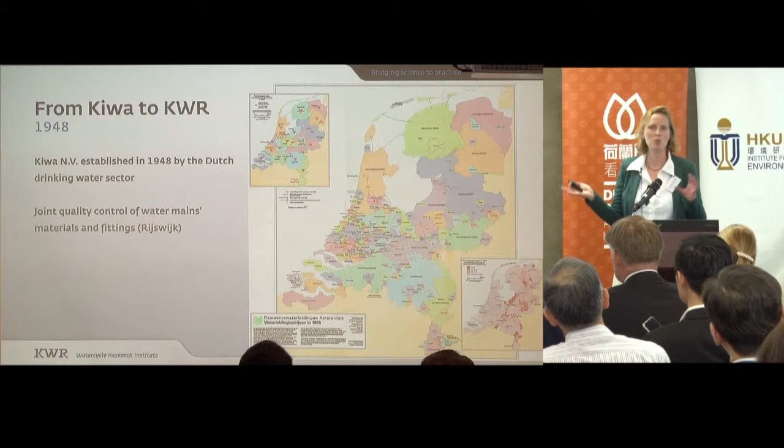I work with KWR, and I thought it would be nice to quickly introduce what KWR actually is. In 1948, there were about 150 water companies in the Netherlands, and they decided to team up. They started KIWA, which was really about certification of water-related articles back then. Then in 1971, they also decided to set up a joint research program, and that was where KWR was originally from. It was then founded.

In 2006, KIWA let us go. So we split, and now it's just KWR. Originally we were KIWA Water Research, but we're not allowed to use that name anymore, so we're really just KWR.

We now have 10 drinking water companies still in the joint research program, and we're so successful that even one from Belgium has joined us as well. So they're our shareholders, and our primary customers as well.

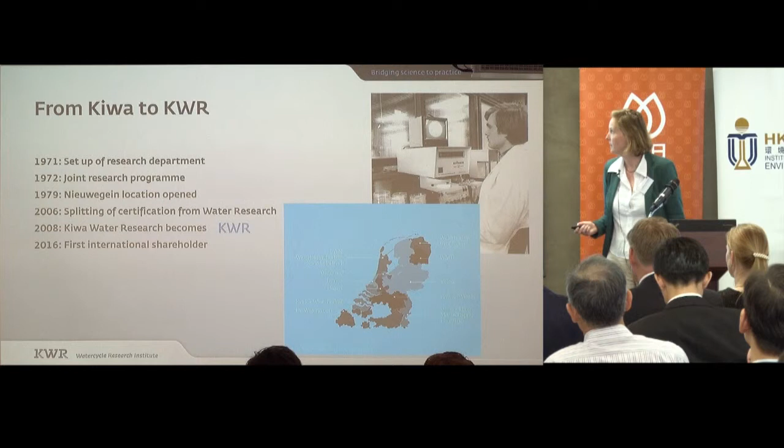We're in this really great building for about 4 years now, very transparent, with lots of places where you can meet colleagues from all different teams. So I'm down here talking to one of my colleagues from the microbiology group. There's lots of interaction across all the different aspects of drinking water and wastewater as well.

I wanted to tell you a little bit about how drinking water is distributed in the Netherlands, some of its peculiarities, and why we have the best drinking water in the world.

We have a network of 120,000 kilometers of pipes. Today, that's about 50% plastic pipes, 30% asbestos cement pipes - which is decreasing - and still about 10% cast iron pipes, usually the older ones.

Leakage is about 3-5%, quite low. The replacement rate is quite low as well, 0.5% per year, but it is increasing, to about 1%, so maybe pipes will be 100 years old when replaced on average. Average pipe age right now is about 45 to 50 years.

The research questions now are much more about how do we maintain this network. In the past, it was about how do we build it, where do we get the money for building new networks. Now it's much more about keeping the best quality we have - which pipes need replacement, when do you replace them, and what do you replace them with.

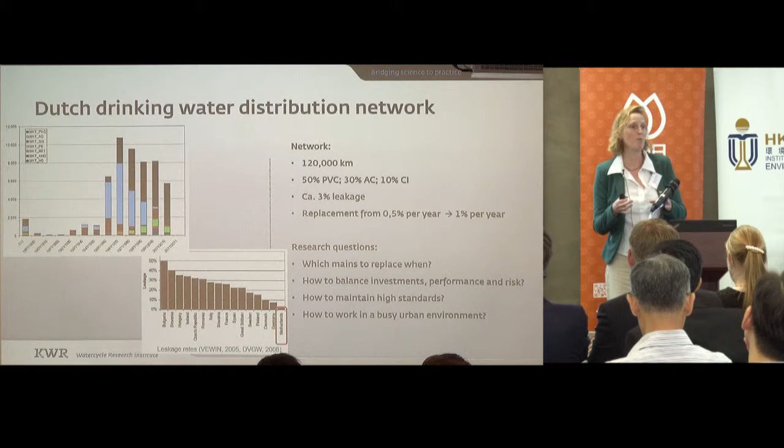This is really a view of the Dutch utilities: when we replace a pipe, we don't just replace it with the same pipe, but we use it as an opportunity to improve our network even further, and really have a future-proof network. Of course, we also see lots of busy urban environments with many other players in the underground, and you have to work with them as well. It's quite a challenge.

So some of the typical things for Dutch drinking water distribution - I've put them in practice, so what's been going on for years and years, then in the second column what research added to that, and a third column on what sort of research we still do.

One important aspect is there's been a focus on quality and long term - it's not a cheap, quick fix solution, it's always a future view and quality view. Also quite important, the fee we pay for drinking water, about €2 per cubic meter, really covers all costs, so there's no subsidies from the government. Water utilities are led like a company, but they're actually in public hands, so their shareholders are municipalities and provinces. There's no residual chlorine in the system.

There's low leakage, low burst rate, and a quite low number of customer complaints on water quality in general, but specifically discoloration is quite low compared worldwide.

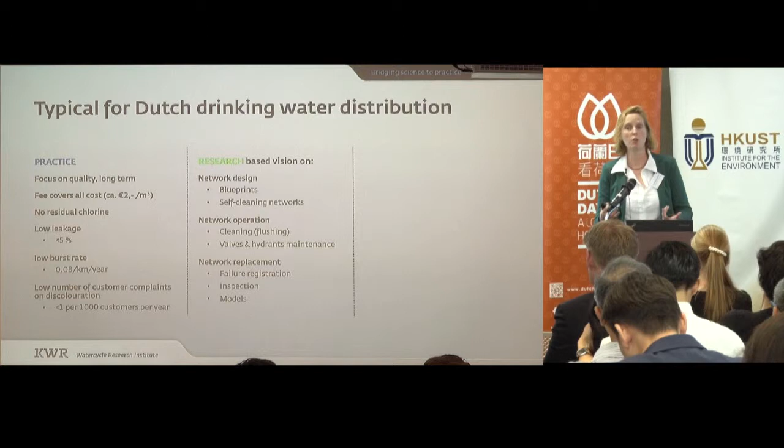What's going on right now, over the last 10 years, you can see they've really put a lot of research results into practice. One of the things is network design - not just putting in big pipes, using plumbing expertise and adding safety factor to safety factor, but really having a research-based vision on what a proper design of a system is and actually building that.

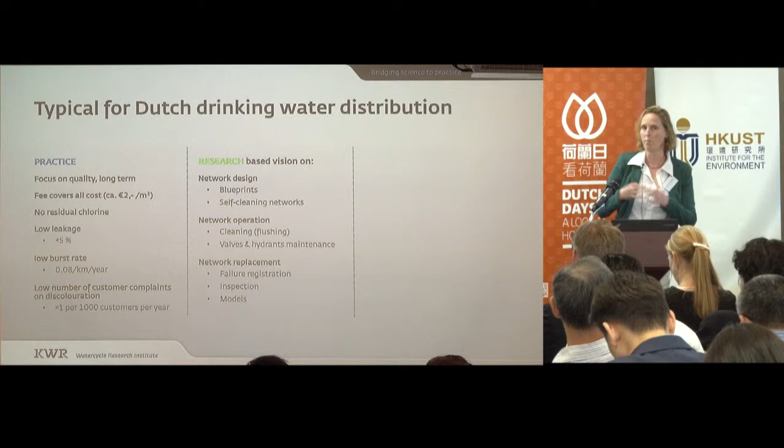Also network operations - we're looking much more at data collected on valves and hydrants, using that for asset management. Same for network replacement, where we incorporate data from the failure registration database, a national registration database, inspection techniques, models, and insight into pipe material degradation.

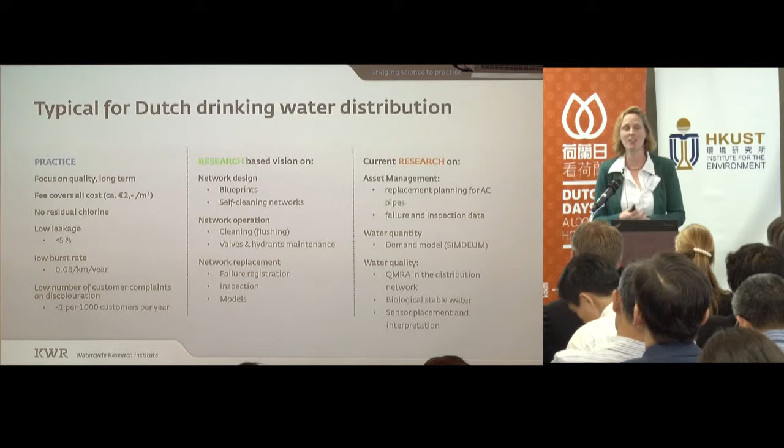I'll discuss a little bit about some of these topics, not all of them, I don't have time. Current research is much focused on asset management, also water quality, demand modeling, hydraulics modeling, and water quality modeling. As we don't use chlorine, we need biostable water - we need to make sure there's no contamination, or as little as possible, and do quantitative microbial risk assessment to keep that low. And of course, sensors and sensor interpretation is a very important research topic nowadays.

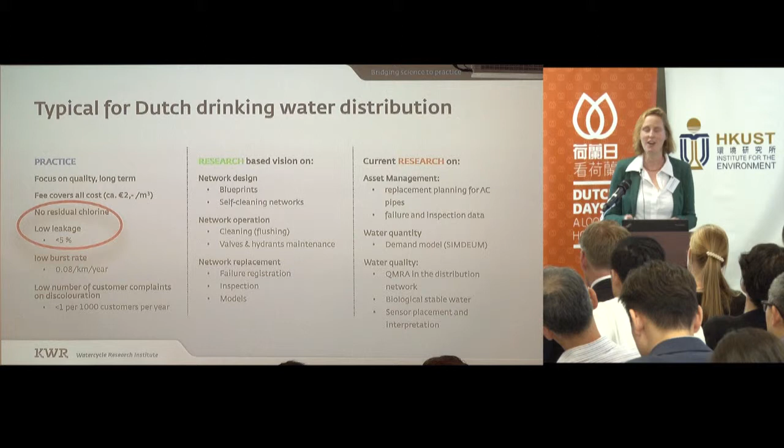So a little bit on the practice. I put in two, but I think I'll talk more about the leakage than the residual chlorine. If you get the slides, you can read this, and there's a paper connected to that.

The low leakage, 3 to 5%, and we didn't really bring it down, it always was this low. How did we do that?

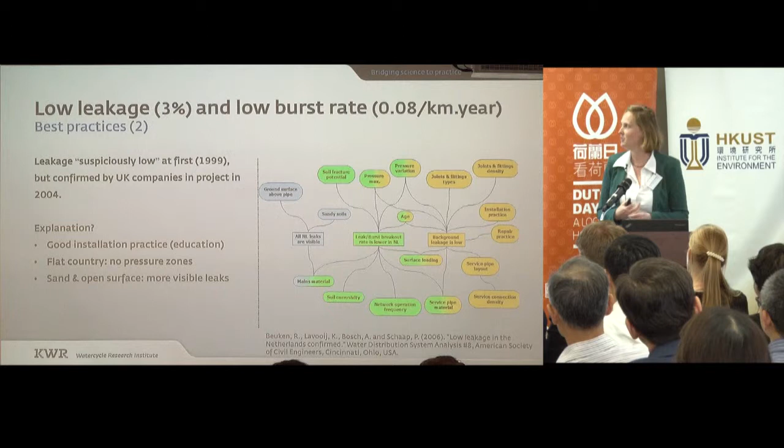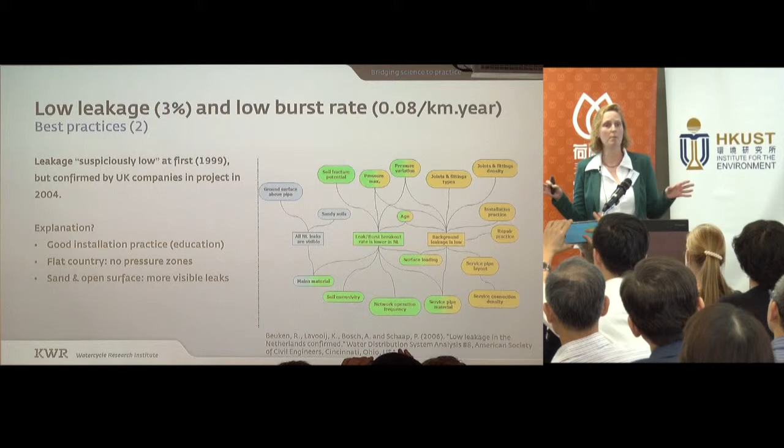In 2004, we did a project with UK companies that really didn't believe us when we said it was 3%. They said suspiciously low, and challenged us to find out how and why, if it was really true. So we used both our methods of top-down and bottom-up estimation of non-revenue water on a UK site and a Dutch site, compared them, and actually they seemed to lead to the same result.

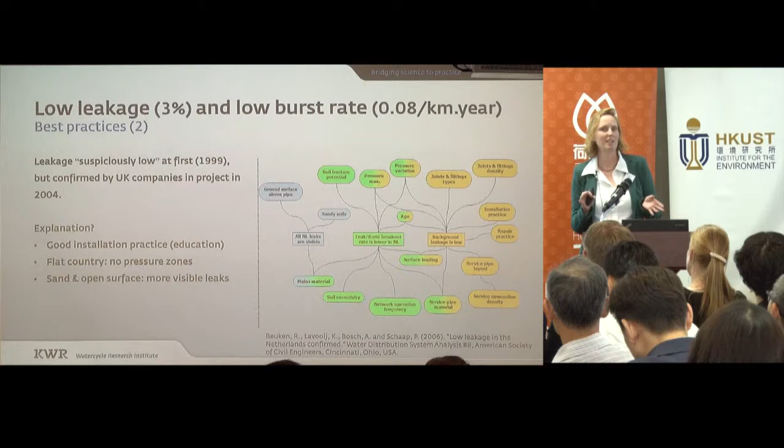We also did some exploration in the field in the Netherlands, trying to find leaks. We didn't go to a place where we thought, oh, this is the best place. We went to somewhere where we thought there might be some leaks, but we didn't really find them.

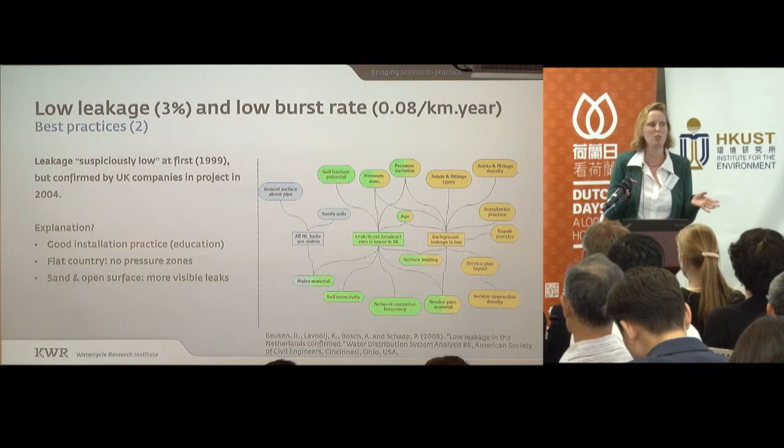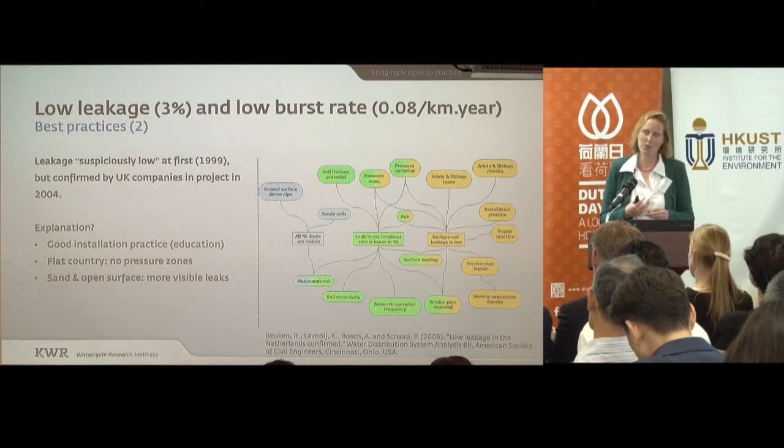But they did come up with some explanations of why leakage is low. And instead of saying suspiciously low, they now say, okay, we believe you. It was confirmed, but still maybe ridiculously low.

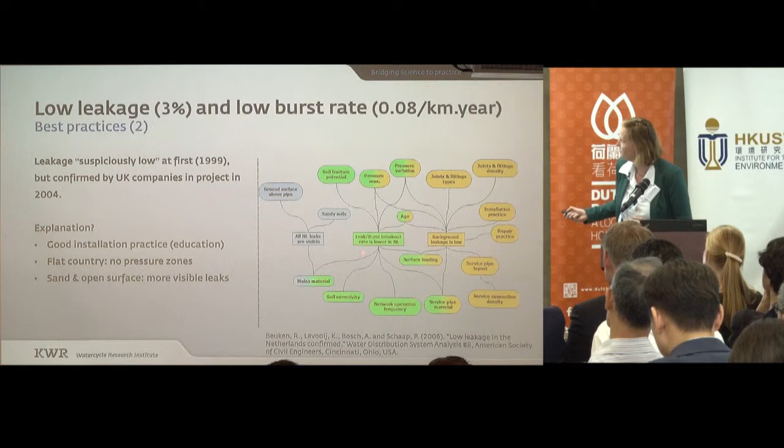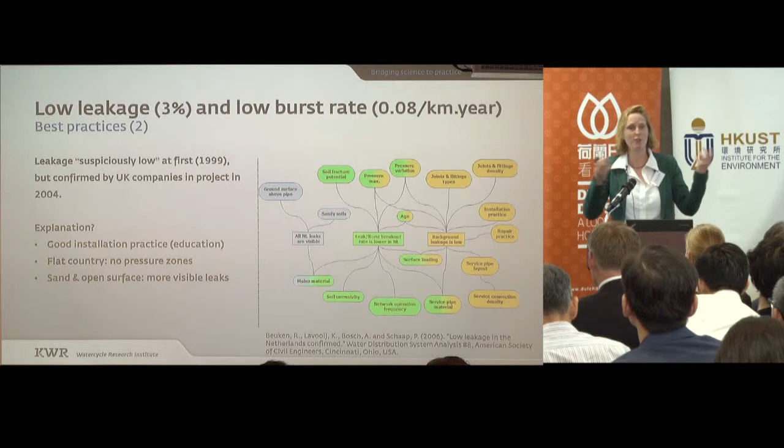Some of this relates to the lucky circumstances that we have. There's low pressure because it's such a flat country. The soil is very permeable - when there is a leak, water will just come up to the surface, and you can quickly find it and repair it. The age of the network is not that high, plus low pressures and things like that.

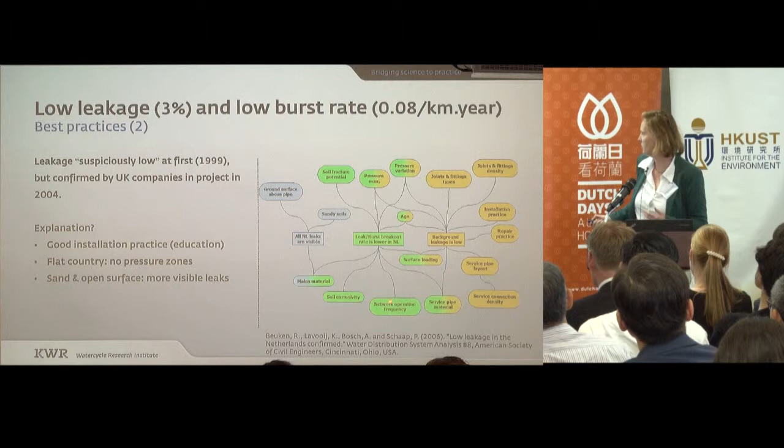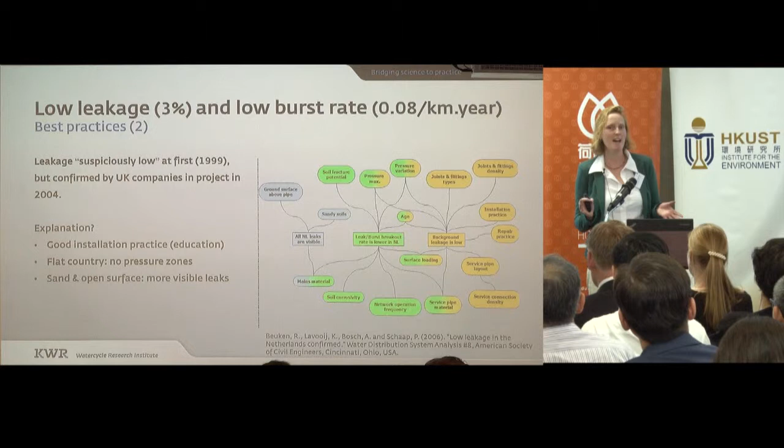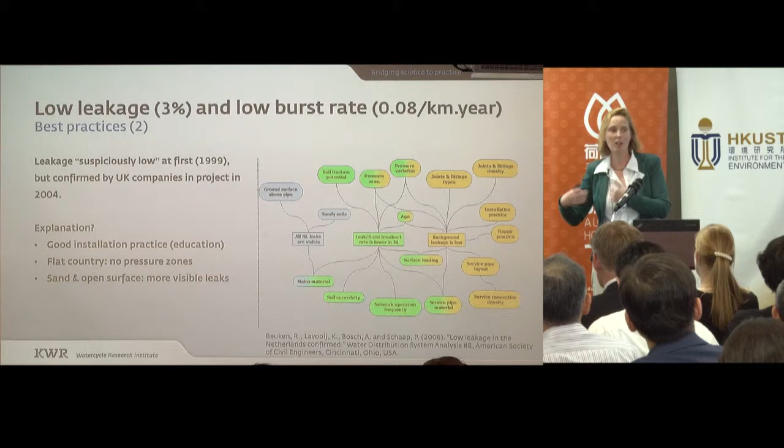But there's also some good engineering practice that we found. The best quote that I have is that somebody from the UK said, I wish that my engineers in the field would speak as good English as yours do - and ours are Dutch people. So it was quite interesting to see that education, and everybody who works on a pipe really knows: I'm working on public health, good water quality is very important.

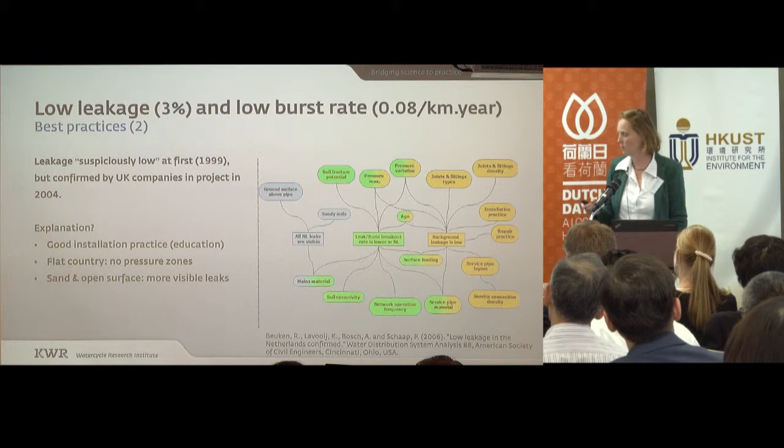So it helps, and it does lead to low leakage because there's a connection for every household pipe, and not everything plugged together, for example. It's really good engineering practice there as well.

Now a little bit on the design of a system - the self-cleaning networks is something that is really very typically Dutch. All Dutch water utilities have implemented it. Some piloting is going on in Belgium, and hopefully next year or this year in the UK.

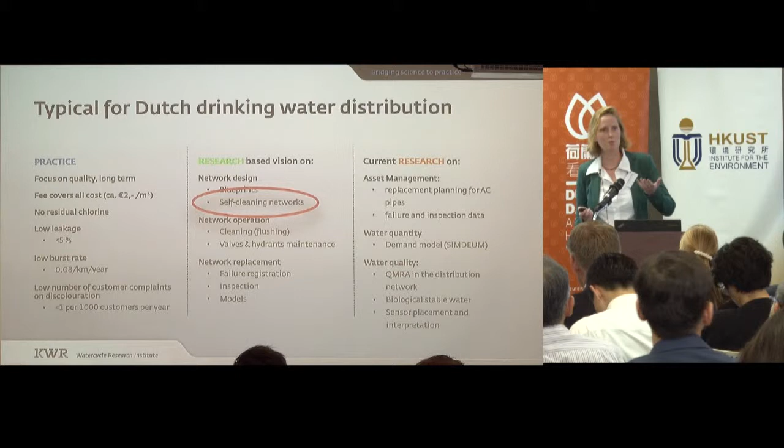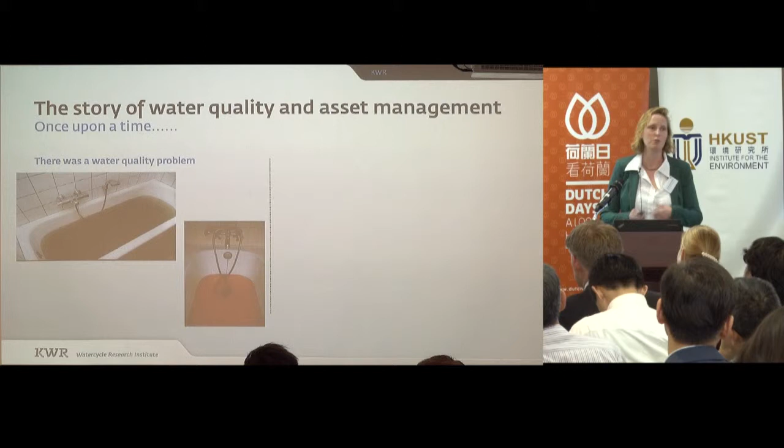But it's a really good story, I believe, that I really like to tell. There is discoloration - not very often, but once in a while you fill up a bath and you can see it, and you can make a photograph. I've never seen it myself like this, but everybody knows, at some point in your life you've seen this.

The story in the whole world is that it's from corroded pipes, right? That's the reason why you have this, and there's nothing you can do about it. But really, as I said in the beginning, there's only 10% cast iron pipes in our network - it can't really be just that. Besides, they're coated with coal tar bitumen coatings, most of them still intact, so it's not a lot of corroded pipes there. So this was the first hypothesis.

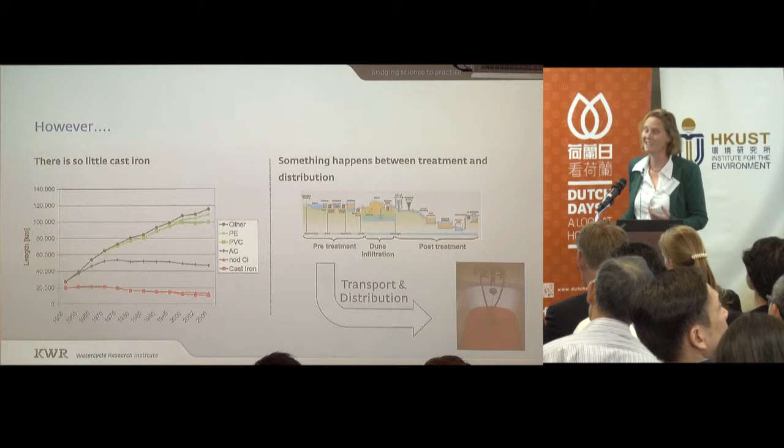It must come from the treatment - there's particles coming in, and eventually something happens in between during transport and distribution leading to this. Now it's not just a hypothesis, it's been extensively tested, and this is really what the true story is. But you can also do something with that knowledge.

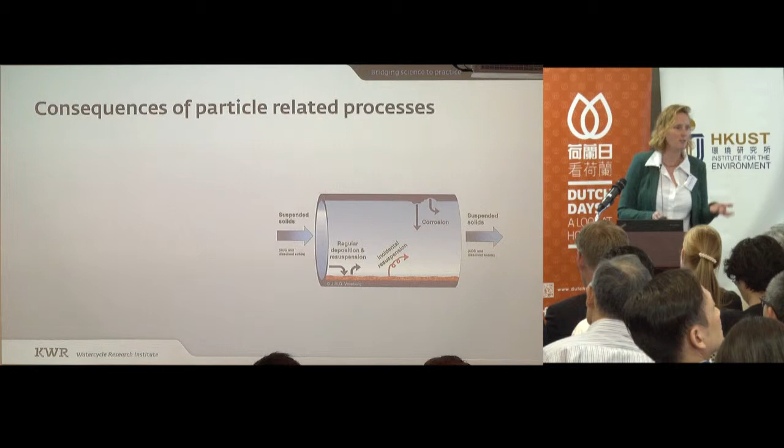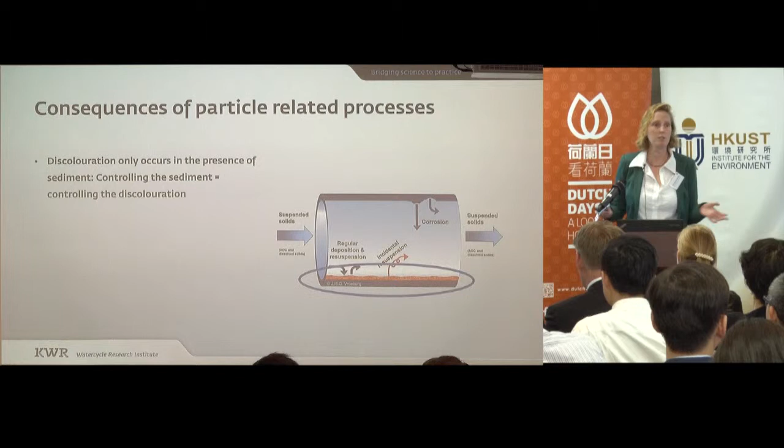What happens is there's particles coming in from the treatment, just a few, but day by day, months, years of loading the system, they will, in a system of hundreds of kilometers, just deposit. Every now and then when you open a hydrant, you get a hydraulic event, and then it's resuspended, and that leads to discolored water.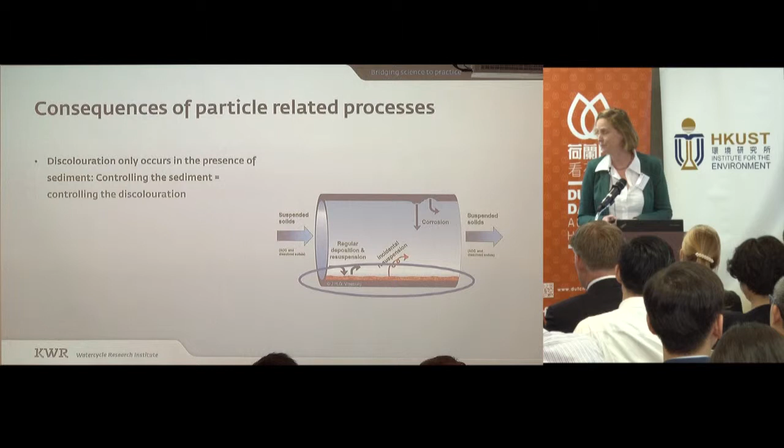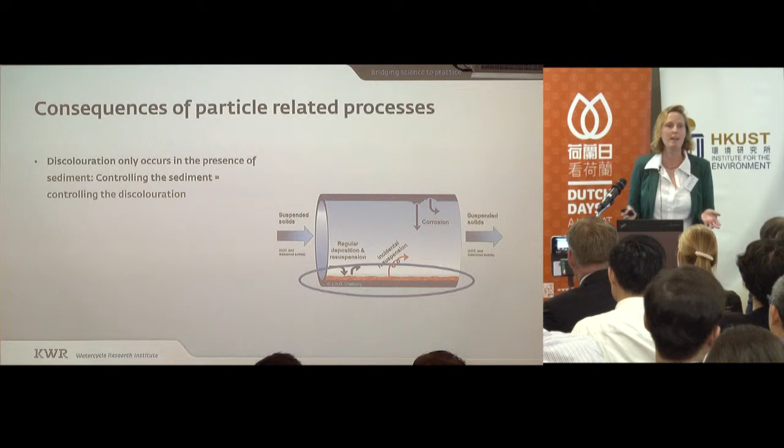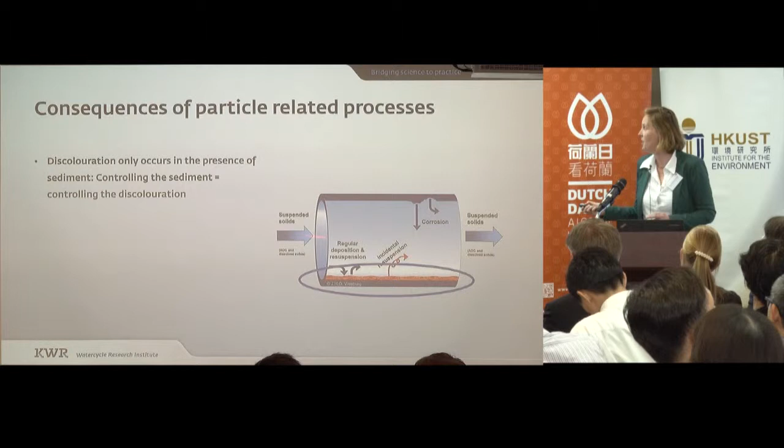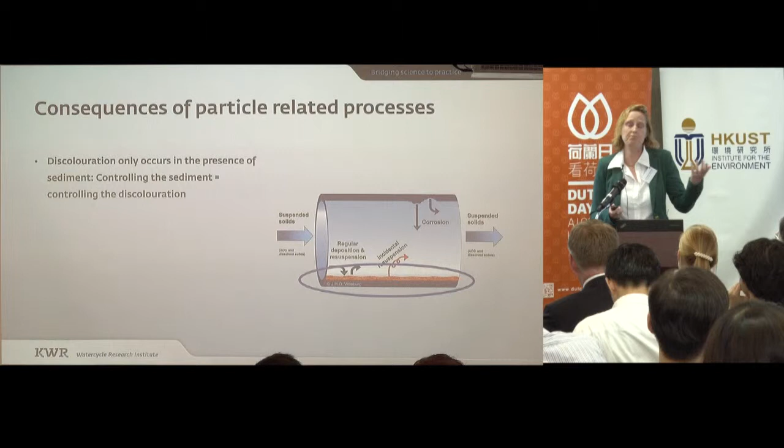So if you make sure that what goes in goes out, then you won't have this problem. This is typically what all water utilities do, because they flush every 3 years, 5 years, 10 years, I don't know exactly. But the trick for the self-cleaning systems is that this balancing happens every day or every other day - everything that settles during the night is resuspended during the morning peak, and it's really very small amounts, so you have a self-cleaning system.

And that basically leads to discolored water in the normal system and a really self-cleaning system in the new design, where your disturbance, if you open a hydrant, is basically the same as what happens every day during your morning peak. So how do you do this?

You make sure that there are no locations where anything can settle, so there's no flow direction reversals. It's a branch system. Velocity is high enough during the morning peak, so small pipe diameters. In the Dutch system with the demands we have, that means 110, 63, 40 millimeter pipes, and it might be a little bit larger here.

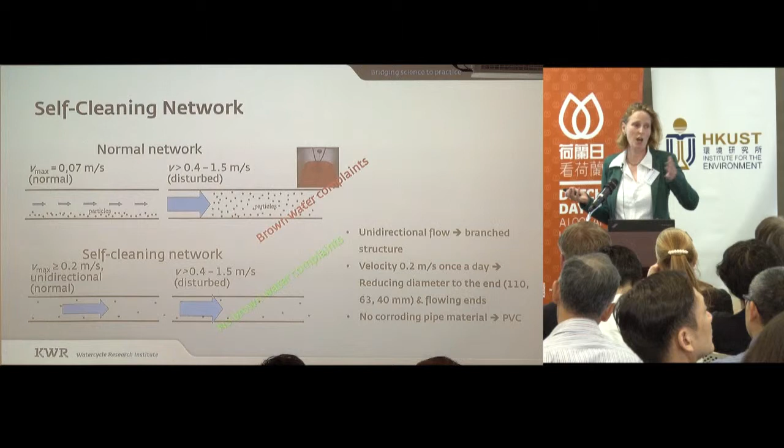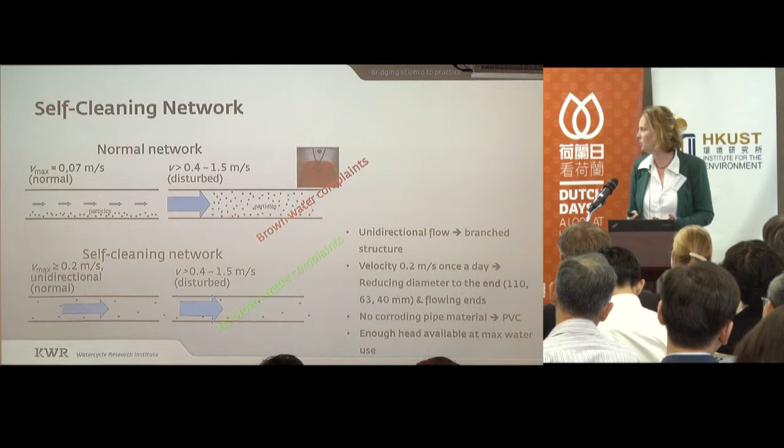Of course, don't use corroding pipe material, and you will see that still once every year when you have a really high demand, you still have enough head available to deliver all the water.

And this is what that looks like in practice. So here's your very safe, secure, looped system, 250 millimeters and higher. That is the backbone, and then you branch off to 110. This here is not connected, and then it goes to 63, 40 millimeter pipes.

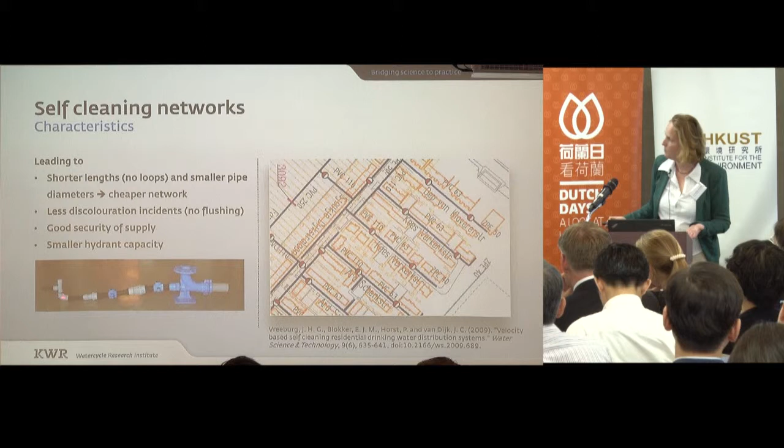And this is about 150 homes that are connected like that. There's still hydrants. We built a special hydrant that would fit onto a 63 millimeter pipe. This can still deliver 30 cubic meters per hour of firefighting capacity. And then after this, it will go directly into the home. This means that there's no dead end, it's a flowing end. So there's no dead ends in that system.

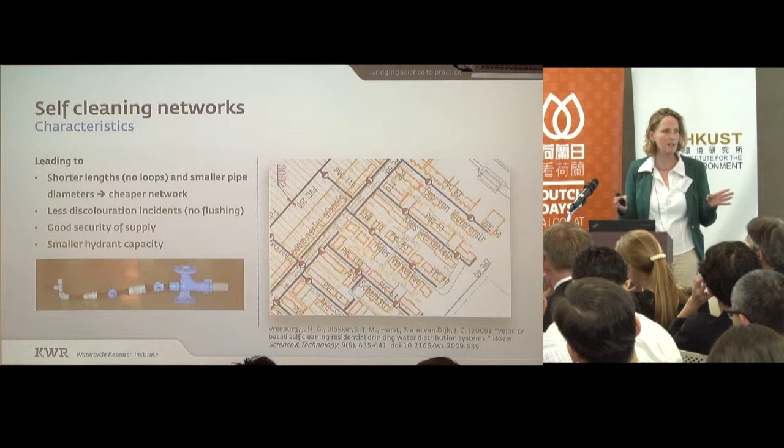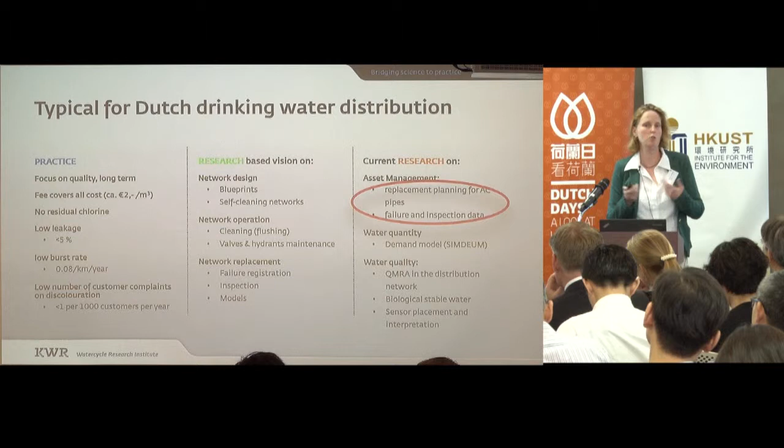Now I want to talk to you a little bit about the research that we're doing. The example is for asbestos cement pipes, but we do similar research on PVC pipes and other pipe materials.

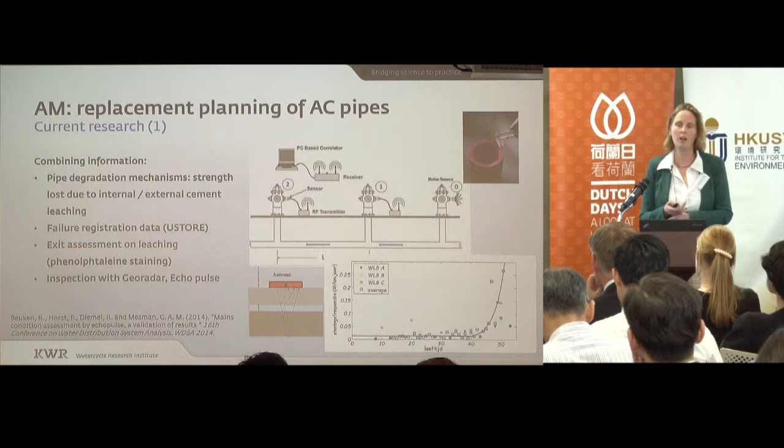So what we've done in the past, and I could almost have added a new figure to this, I'll talk to that. It relates actually to something that Mohammed just said. But so we look at pipe degradation mechanisms, really looking at the science behind the degradation. Then we try to combine that with the failure registration data that we have.

There's a slide next to this. And we also look at exit assessment on leaching, for example, here to see with the pH test what the strength of the wall still is. And you can even correlate that with inspection with georadar, echo pulse, ultrasound.

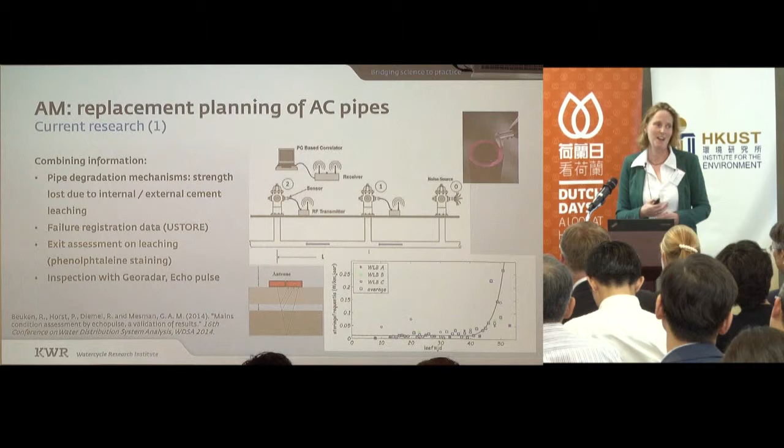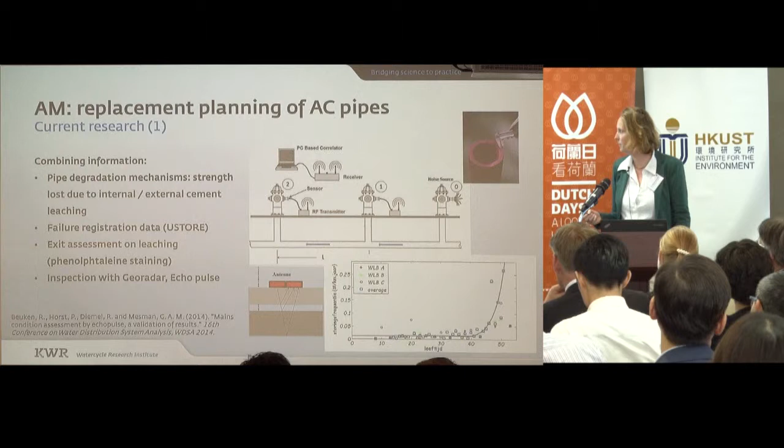And the graph that next time I'll put here is a CT scan, because we actually put AC pipes into a CT scanner. You said you wanted to have the full image of your system. Well, of course you have to excavate it and then put it in the MRI or the CT scanner, but we have a really nice view of what that pipe actually looks like. So this gives us really a lot of insight of how AC pipes degrade over time, and this will help utilities estimate when to replace which pipe and really do this in a cost-optimal way.

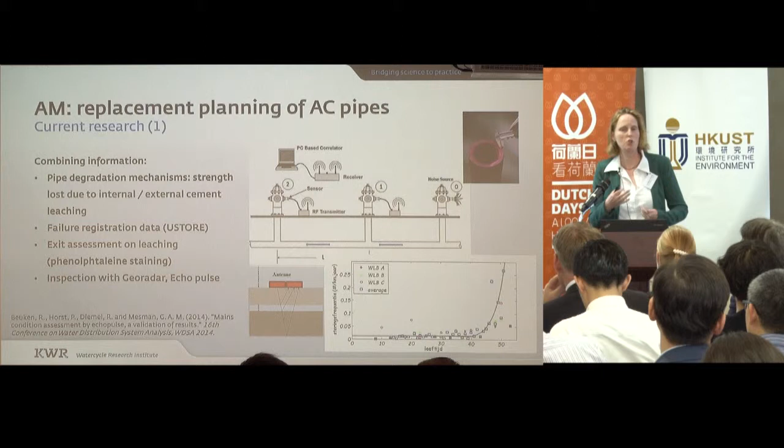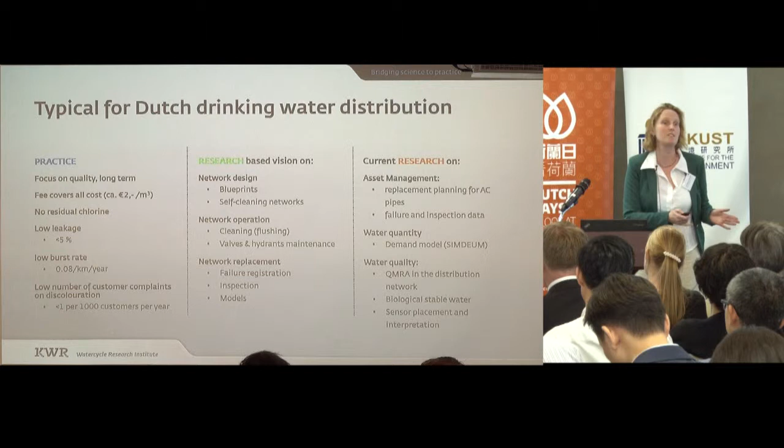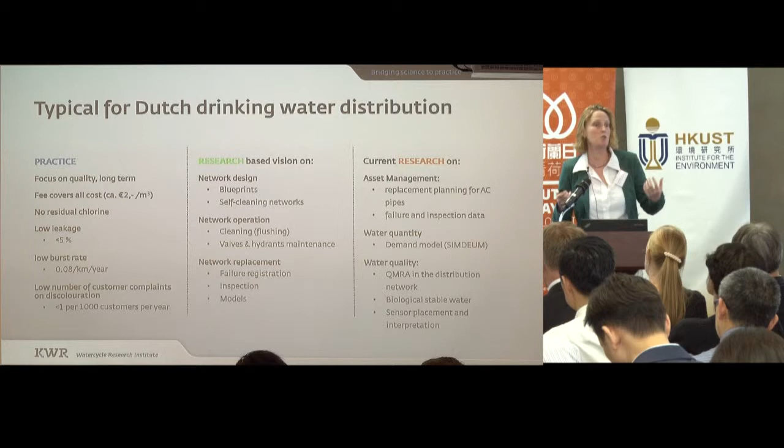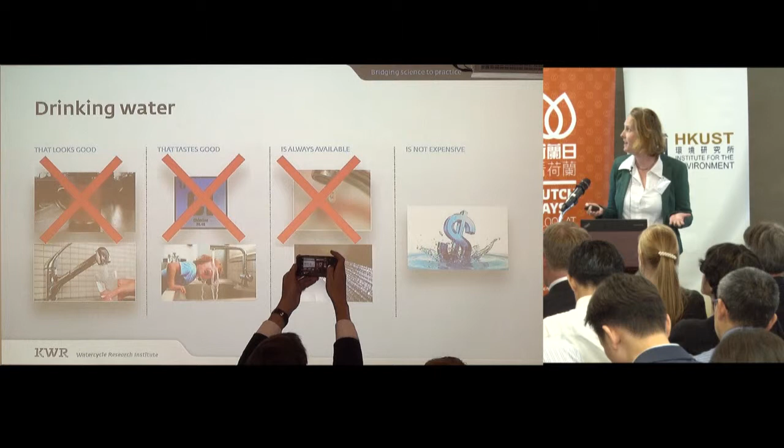So I told you a little bit about how water utilities work in the Netherlands, their view on quality, their view on research. They contribute, they invest in that, they actually use it, and more research is still being done together with them in the joint research program. And this really leads to water that looks good, is clear, that tastes good, there's no chlorine, people drink from the tap really. It's always available, more or less, and it's not expensive at all.